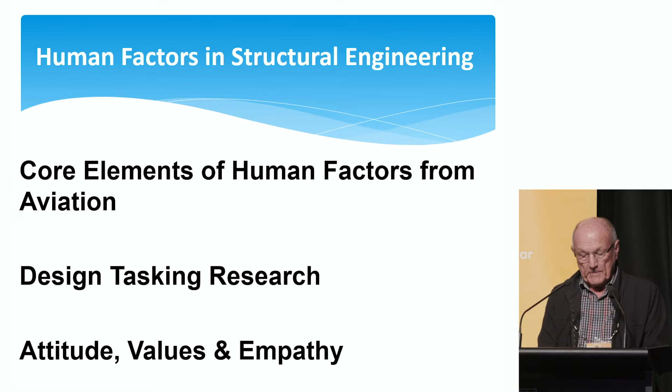So as we heard this morning, and most of us are aware of, engineering mistakes continue to be in the headlines, New Zealand, Australia, and overseas. Something's wrong. And as Paul said, when quoting Einstein, I think it was, do the same thing, you get the same answer. So I think we've got to look at doing something different. In aviation, the passenger death rate was recorded from 1920 through to 1977, showing a steady increase. And after that, it's descended with a tenfold reduction.

In 1977, two Boeing 747s collided on the ground at Tenerife Airport, killing 583 people. And Captain Downey, in his address, said that was a watershed moment for aviation, because we decided as an industry that we had to do things differently. It began as cockpit resource management, and then crew resource management, and then fully blown human factors. And that study of human factors and implementation of it has and continues to have a significant improvement in aviation safety.

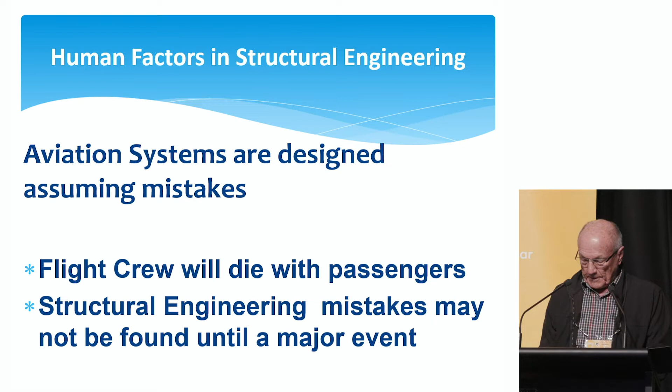Some other industries have taken on human factors, especially those in safety critical and high risk areas, including transportation, oil and gas process industries, and the nuclear industries. The medical profession in the UK recently called on aviation experts on human factors to try and improve their performance in hospitals. Now, we as structural engineers, we study materials and systems, but little, if anything, formally about the people doing the structural engineering.

Human factors, what are they? On the slide there, there's a bunch of different disciplines involved: various forms of psychology, industrial engineering, cognitive science, computer science, and medical science. So the term really refers to the range of issues that affect how people perform their tasks in work and non-work environments. It involves applying knowledge about the human body and mind to better understand capabilities and limitations. They are social and personal skills which complement our technical skills.

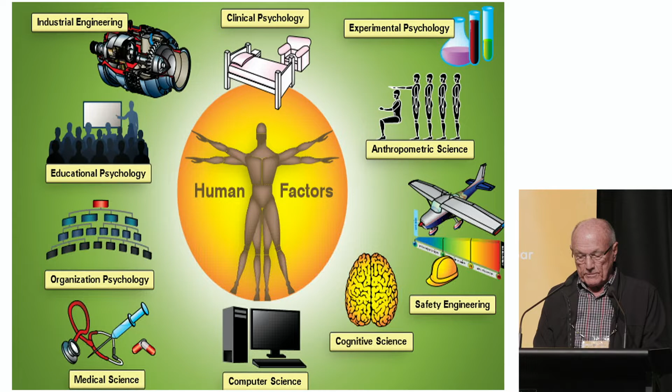Now, for today, I've taken the 9 core headings from the New Zealand Civil Aviation syllabus on human factors, and there are just very brief introductory comments under each heading.

Organisational factors. The culture of an organisation is crucial. In aviation, a just culture or no-blame reporting of incidents and mistakes is encouraged. So if the proper resources are available and to hand, there's a greater chance that the task will be completed effectively, correctly and efficiently. A happy workplace where openness, good communication and positive support exist will encourage higher productivity and lead to fewer errors and mistakes.

Stress and fatigue. Fatigue is a general term used to describe physical and or mental weariness that extends beyond normal tiredness. It often leads to mental fatigue, a decrease of attention, and of the ability to perform complex or even quite simple tasks with customary efficiency. Stress. There's a whole bunch of types of stresses, but usually they can be accumulative.

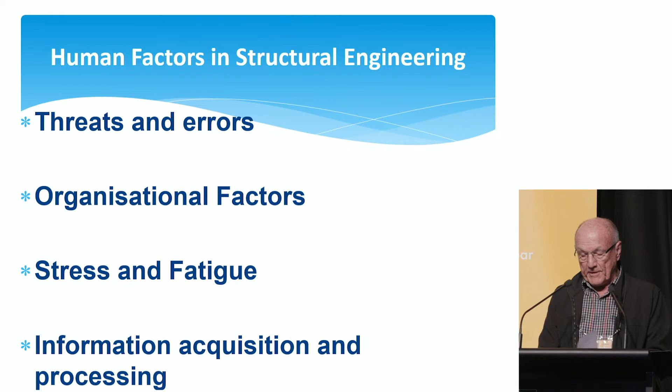Situational awareness and workload management. Situational awareness is really just knowing what's going on around us, and was traditionally applied to the flight deck and the pilot knowing what was going on around him or her, so they then could anticipate and know what they might have to do next.

Workload management's the process, obviously, of distributing work amongst employees and monitoring its use and making sure that people are not overloaded and they've got the right amount of work ahead so that they can perform their tasks efficiently. Again, important in both aviation and engineering.

Decision-making. Attention and perception shortcomings can clearly affect our decision-making. If we perceive something incorrectly, it may mean that we'll make the incorrect decision and then an inappropriate action. So we depend on our memory to make decisions. Sensory and short-term memory have limitations both in terms of capacity and duration. It's important to bear in mind that our memory is fallible, so information may not be stored or may be stored incorrectly.

Communication. Poor communication is almost always on the list in aviation accident reports. It refers to the transmitter, the receiver, as well as the method of transmission. Transmitted instructions may be unclear or inaccessible. The receiver may make assumptions about the meaning of these instructions, and the transmitter may assume that the message has been received and understood. With verbal communication, it's common that only 30% of a message is received and understood. So good communications are critical in both structural engineering and aviation, and poor communication often features in engineering disciplinary cases.

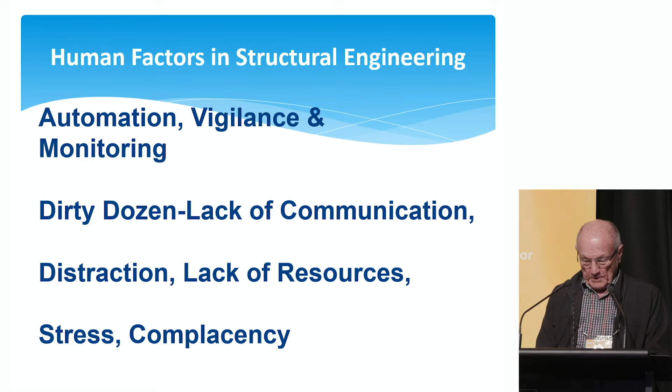The other group, a group called the Dirty Dozen, comes from aviation maintenance. Now let's go through these headings, because some of them have already been covered, like lack of communication, distraction, lack of resources, stress, complacency, lack of teamwork, lack of awareness, lack of knowledge, fatigue, lack of assertiveness and norms.

So workplace practices, in all sorts of workplaces, develop through time and depend a bit on that workplace culture. They can be good and bad, safe and unsafe. And they're often described as, well, that's the way we do things around here, and they become norms. Unfortunately, they're not always appropriate.

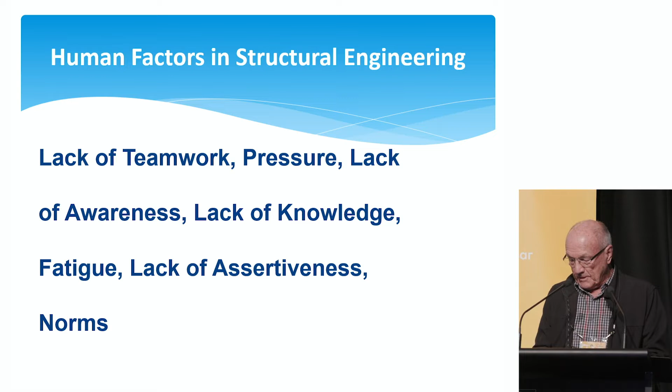So in addition to the aviation sector, I thought of a few other human factors that might affect our performance. So different personality types affect our practice. Are our outcomes different from high risk takers compared to the play it safe personalities? Is the engineer a team player or individualistic? And what's the role of ambition, hubris and arrogance, together with the more unsavoury aspects such as greed and avarice?

Now, I didn't really know what hubris meant until I listened to the Lessons Learned session by Bryan Leyland, where he attributed hubris as playing an important part in the failures of the Ruahihi and Wheao hydro schemes. And if you haven't seen that, it's a very good webinar, and it's available on the Engineering New Zealand site.

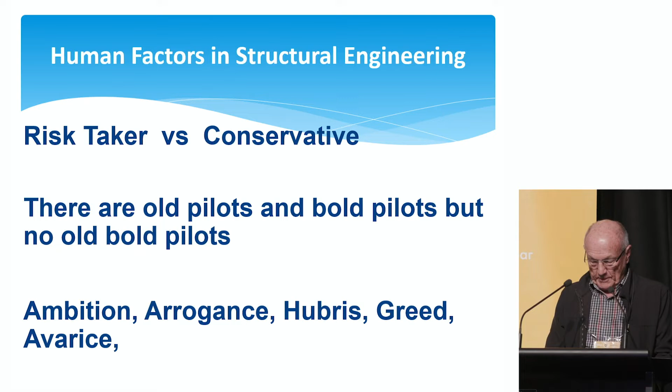Our work environment can affect our performance. If we work in isolation, only considering one's own responsibility can lead to tunnel vision, a partial view, a lack of awareness of the effect of our actions and how they affect others. So it's important to ask others to check our work when we're gaining experience.

Reason's Swiss cheese model has already been referred to today. Again, for those that are not familiar with it, imagine a series of slices with a bunch of holes in them. Some of those slices may be active, some may be latent causes, and when the holes line up, then we get an accident, mistake, or a failure.

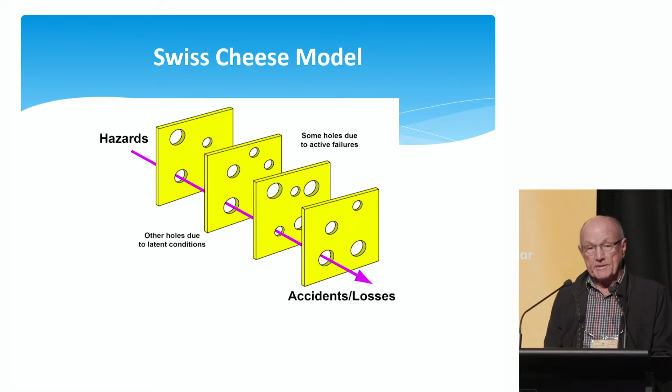There have been a number of surveys on structural errors, and these indicate that 43% of the failures are related to design, 35% to construction, 15% to maintenance, and 7% to other causes. And of those for design, other research indicates that lack of knowledge accounts for 44%, motivation 35%, information 18%.

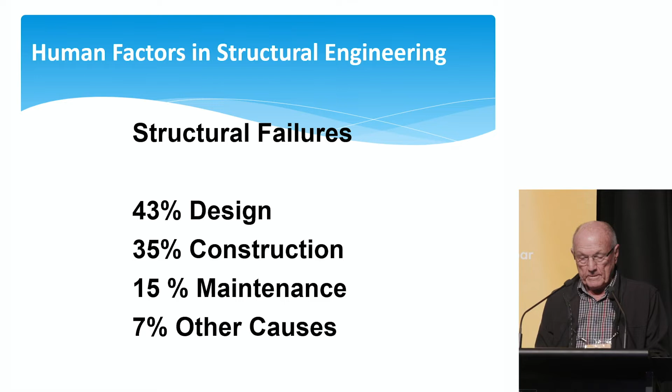So what about the costs of design errors? The Australians carried out a survey on 139 construction projects, and there the design error costs were estimated to be 7% of the contract value, regardless of the contract type or procurement.

So I've tried to have a look at what the GDP might be for the construction sector in New Zealand, and had a look at some of their data, plus the data from the PricewaterhouseCoopers study for Engineering New Zealand. So maybe of the order of about 20 billion a year. So if we convert that, errors and mistakes in design could be costing $1.4 billion a year, which is quite a tidy number.

So structural engineering, uncertainties abound. Our task is to synthesise a solution which meets the client's requirements. Not only must it be designed to be safe, it must meet functional, performance and environmental requirements and be delivered at an acceptable cost. So uncertainties are a perpetual companion for us.

Through design, we construct imaginary buildings with uncertain geometry, with materials of uncertain strength and quality, to withstand loads and environmental conditions of uncertain magnitude and kind. To that we must add the human factor, which means that there's an uncertain amount of errors and deviation from what was intended that will be incorporated in the final structure. Sometimes these are obscured to the practicing engineer by the development of design codes to manage some of the more important ones, for example, loads and materials properties.

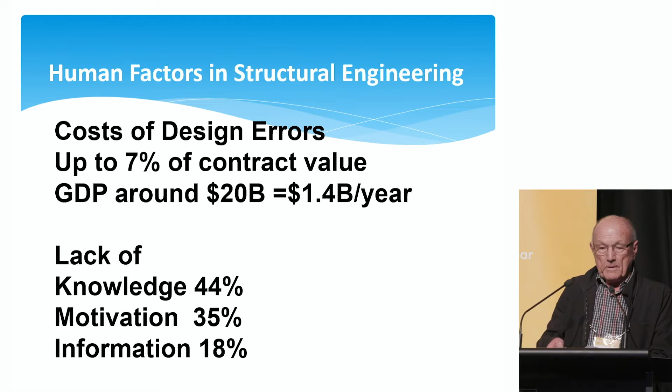Engineering Modelling Uncertainties, EMU, was developed by Swedish researcher Fröderberg, who showed that well-defined engineering tasks generate a large variation when solved by different engineers. EMU has a large impact on structural safety. It is usually time-dependent and diminishes throughout the design process.

So normally it's not possible to obtain a correct solution. Usually a range of acceptable solutions is more appropriate. Other studies, Dehan and others, show that self-checking of designs, even just simple tasks such as looking up tables, shows an error rate of 2.4 to 3 times the chance of errors compared to those with independent checking. So again, that reinforces the need and the critical role of effective quality assurance and independent checking.

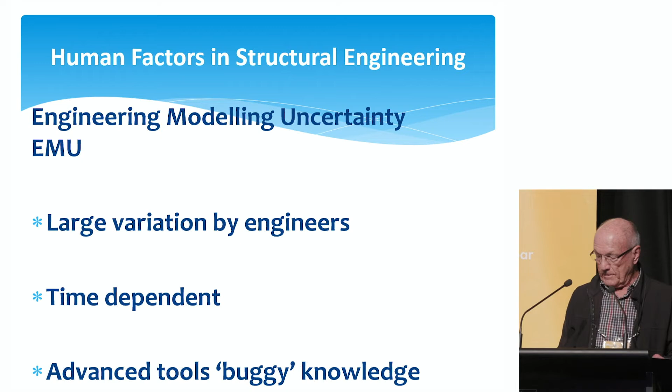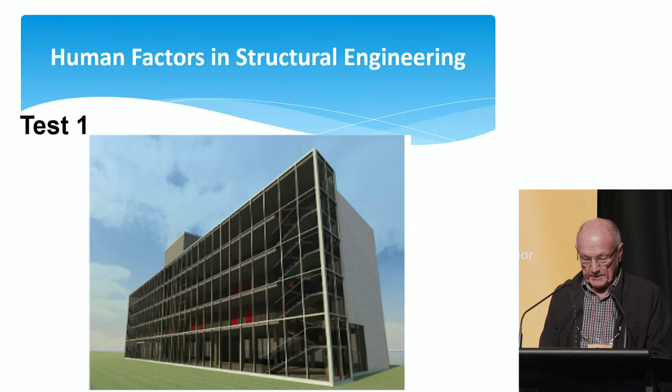So in Sweden, 17 engineers of varying experience were given design tasks and limited time to carry them out. First was this 5-storey concrete building. Second was to design a truss over a stadium, a 68-metre span truss. Afterwards, they had a qualitative review. The results indicated a 300% range in the loads of the ground floor column of the 5-storey building, and the steel on the trusses varied between 20 and 50 tonnes.

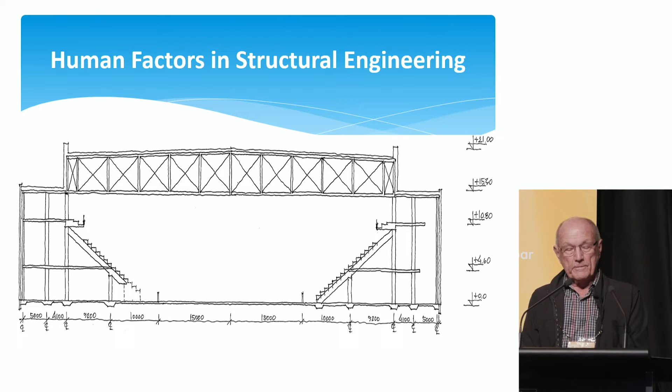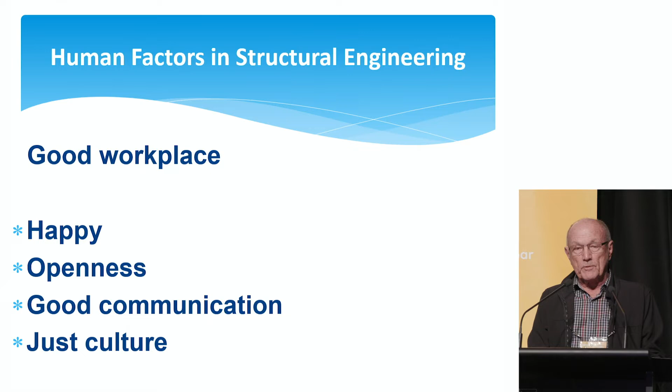Also, an important finding of the review was that the majority of those 17 engineers had had little review of their calculations, their work and their practice up till that time. So what then makes a good workplace and a good engineer? I'd suggest it's a happy workplace where there's openness, good communications, a just culture that will provide satisfaction for all workers, enable them to reach their potential, improve productivity and reduce mistakes.

Now, coming back to aviation, there's a YouTube video, Defence of Flying, which has some good points on human factors that are also relevant to us. These include the difference between attitude and values. Attitude can be short-term behaviour and easily manipulated, whereas values are long-term, developed over time, and include what means most as a backstop to decision-making and making the right choice. Empathy can be our greatest advantage in understanding others, but also our greatest weakness, especially if you do not want to disappoint. So understanding human nature, good self-reflection, a strong code of ethics and values help to make the right choices and become a good engineer.

So I believe that better understanding of human factors, as in aviation, will lead to improved outputs. And if we can emulate the success the aviation industry has had by adopting human factors, maybe we can get the tenfold reduction in errors and accidents that we need. I believe that positive aspects will flourish and that our profession will be better off.

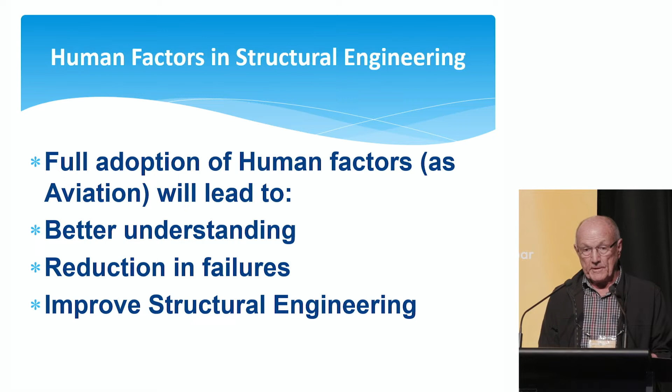At the same time, we're still seeing some examples of poor engineering, a confrontational nature, and that can be seen as bullying, which are the behaviours that we're trying to mitigate in our careers. So are we getting better now? That's probably one of the questions that we'll cover.

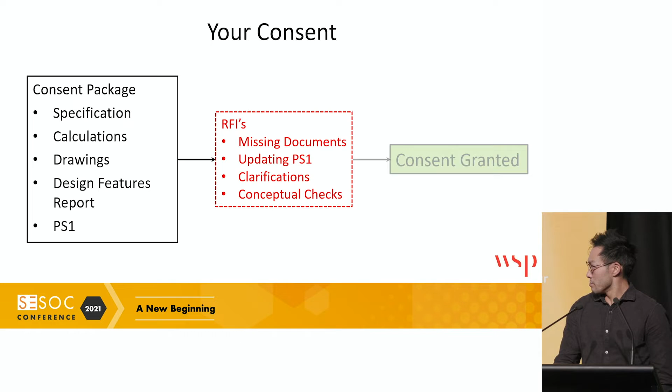And once all those are cleared off, consent is granted. So the councils look to classify buildings in three categories depending on the complexity. Your category ones are your single-storey houses. These are normally screened out, so I guess the engineering side doesn't get looked into.

In terms of category 3 buildings, there's some that we don't necessarily look at, and those are your high-rise buildings, and they normally have a PS2 and that high rigor that is beyond what we do as a regulatory review. In doing peer reviews, something to be mindful of is that the person undertaking the peer review does have the right experience, and you are doing those communication logs to see that the right questions are being asked.

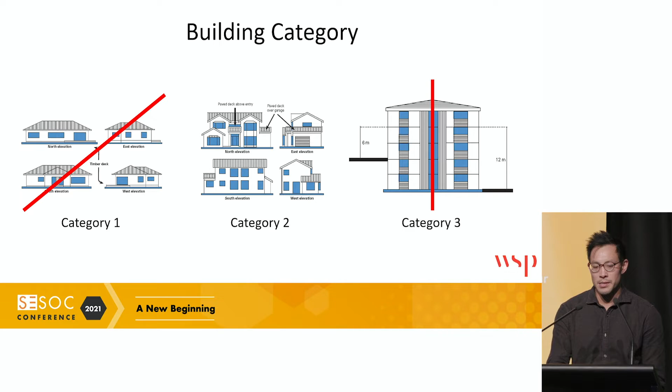So in terms of the review time we get, you can see, for Category 1 buildings, looking at 60 minutes, and then for Category 3, we're looking at 3 hours. So the role of the regulatory review is just a screening tool. We're not looking through all your information. If you think about the work you submit, your 100 drawings, your 200-page spec, and your 600-page calculations, we're not actually going to look at everything. It's more of a screening tool to make sure everything ticks the boxes.

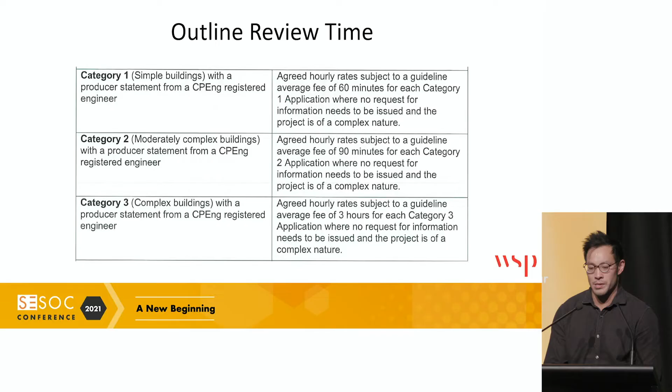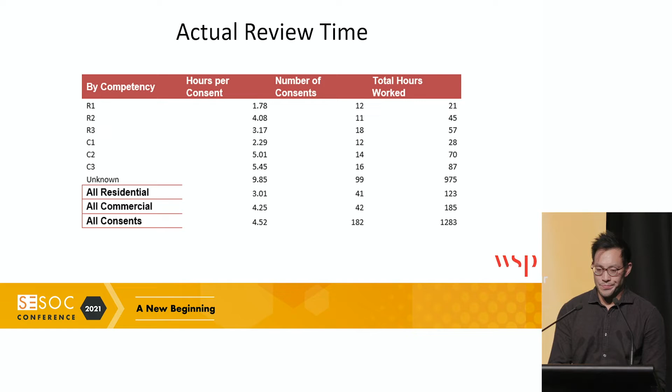And this is the actual times that we're looking at. So when you think about it, it is in line with what is being expected. So this is a slide that I put up in 2019. I still find it a bit hard to put up, just because some of the comments that do get made to reviewers can be quite confronting.

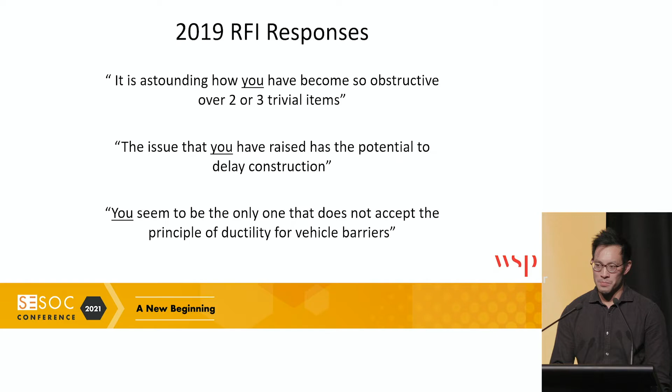And I guess the thing is, it is your responsibility as designers to respond to RFIs in a respectful manner. It's not even a professional thing, it's probably more of a human thing. So let's all be nice to each other.

What we're seeing in 2021, probably much the same. There's still a lot of trying to elaborate on things which are unnecessary. And when we even look at the question, do we actually need a response like that? Why would you waste your time writing that out when all you needed is a simple answer?

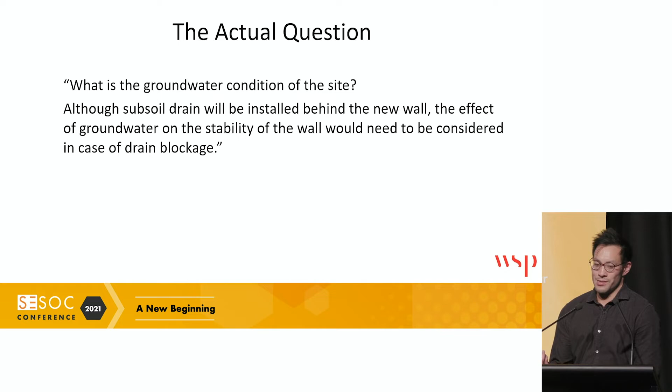So how should you respond to RFIs? I think just be professional, read and understand the question. Put yourself in the reviewer's shoes, and don't just go blaring out thinking you're right all the time. If it's an easy answer, then respond with enough information. If you think the answer is already in the documents, then just provide the right references to that.

And if the RFI is valid and you change something, this is a good outcome. The system has worked, so change it and respond appropriately. Don't bluff your way through the answer. Time and time again, we've seen that engineers will use their calculations and submit pieces of paper which don't have the information that you need.

And when this happens, you go through multiple instances of RFIs, and then it's finally changed. And when people actually realise it's changing from, say, an M12 bolt to an M16 bolt, it's kind of a bit of nonsense. It should just be done, to be honest.

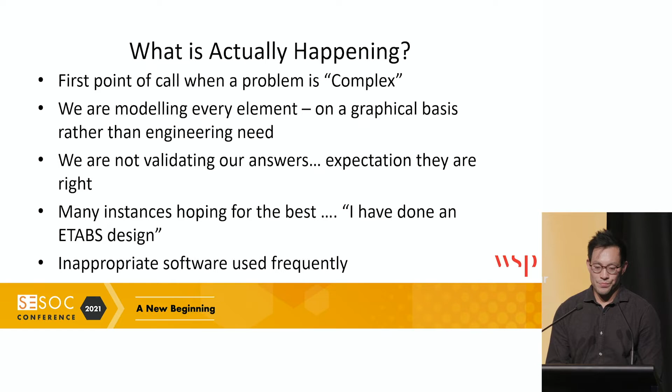Half time, you get me now to take over from Stan. Thanks, Stan. That's excellent. So in this talk last time, Stan gave some specific examples and put up some anonymised real examples. We're not going to do that this time. You're just going to have to take our word for that, and there are plenty there. We were fighting over it for about 6 months, who had the best examples, Stan and I. So I don't think there's any real benefit in that.

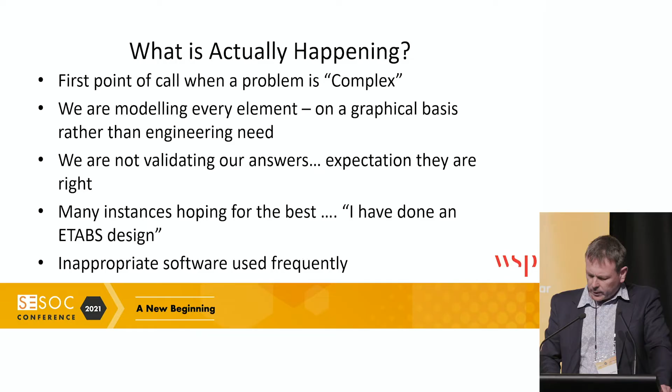So what I wanted to do is talk about some of the results of what we're seeing through our behaviours in submitting for consents, and also behaviours within the industry, and where some of the councils are going with this. Here's a draft proposal that Wellington City Council is looking at around incidences of bad behaviour from engineers and what they have to do to manage that. They are putting a register down to see how they can manage and deal with this. Why do our consenting authorities, why do our clients have to do this? Aren't we professionals?

Just a wee note, these are being shared around between councils, and councils are coming up with these processes. If you look at Auckland, they've got a different process where they pretty much make you do a PS2 for everything, and the industry looks after it. But a lot of the regional councils, this is what we're getting. So let's just move on from that.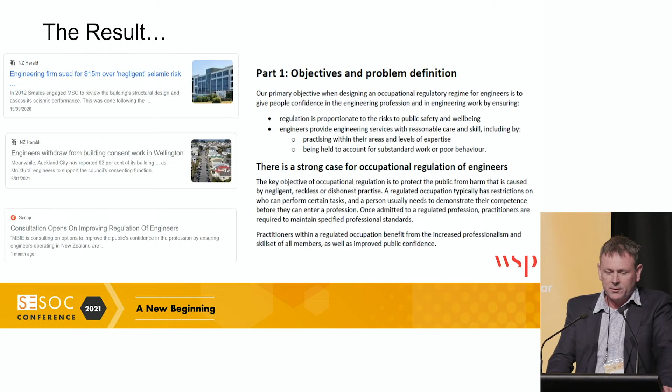And lastly, the regulator. Consultation has opened up on improving regulation of engineers. They've had to take notice and they've had to take action. We currently have consultation on improving the regulation out now, and I read part one, and I get down to the first paragraph after the bullet points, and this is pretty strong stuff. The public need to be protected from us through occupational regulation because we're negligent, reckless, or dishonest. As an engineer loving the profession and putting a lot into it over the last nearly 30 years, I'm really disappointed to see that we've gone from one of the most trusted professions to one that has to be strongly regulated.

And anyway, to summarise, we are still seeing a few poor behaviours in submission. Similar to what we talked about in 2019, councils are now being more active in monitoring. There's less tolerance by the public for poor engineering outcomes. We are seeing a more active litigation front, and the outcomes affecting reputation and trust, and the media coverage. It's so easy to put media coverage out there now. You don't have to fight for space on broadsheet media. It can just get out there. And Phil Pennington from Radio New Zealand loves to find engineering stories. And our regulator has been forced to act as a part of this pressure. So now is the time to look at where we've got to and move forward and show that we're a great profession.

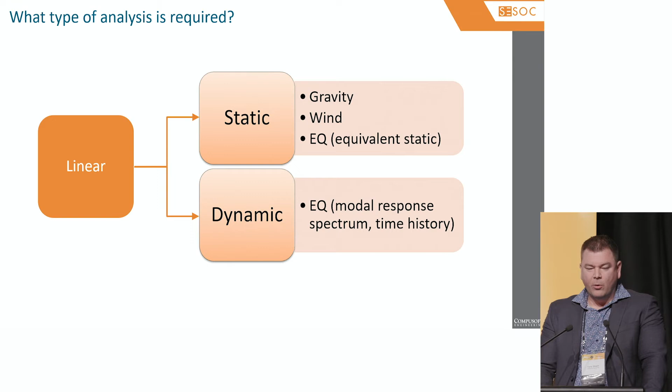So we've introduced the idea, and it's come up already, that you've got linear and non-linear analyses. Linear analyses are obviously the ones we do mostly, so I think it's important for us to define what the different analysis types are and when they would be mostly used. So for linear analyses, we split between static and dynamic type analyses, the routine ones being in this block. The key one there being earthquake actions are considered in each box we'll talk about today, but in varying degrees of complexity.

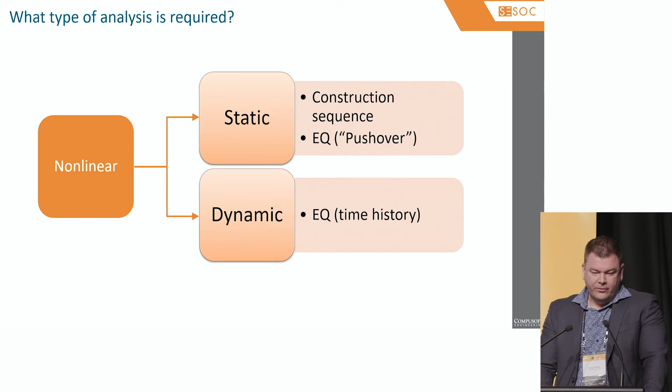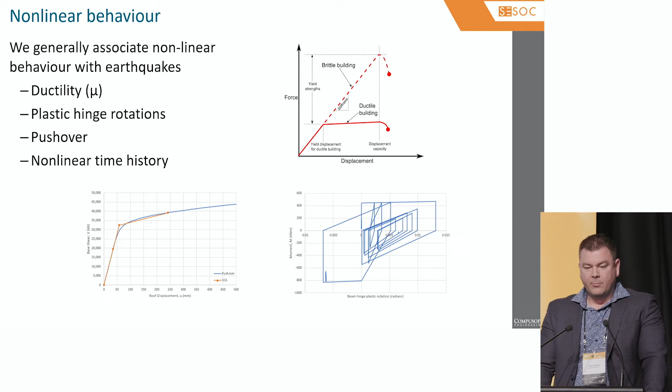Again, for non-linear, we've got similar processes, where we're looking at different effects such as construction sequencing or nonlinear behaviour during earthquakes. Importantly, you'll note that there is no such thing as a nonlinear response spectrum. More importantly, we generally associate nonlinear behaviour with earthquakes. We all understand the concepts of ductility, plastic hinge rotations, pushover type analyses, and nonlinear time histories becoming more commonplace via the assessment guidelines. But it's also important to note that nonlinear behaviour exists in many other facets.

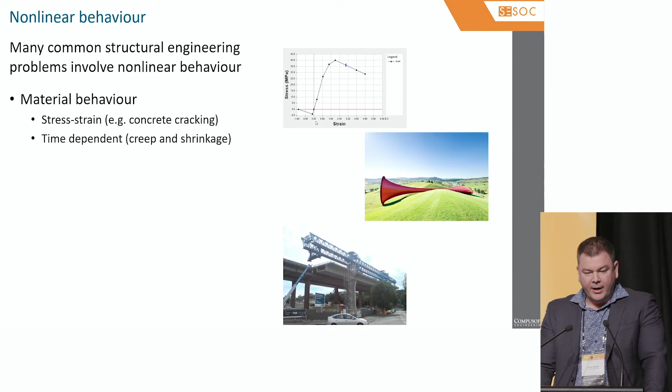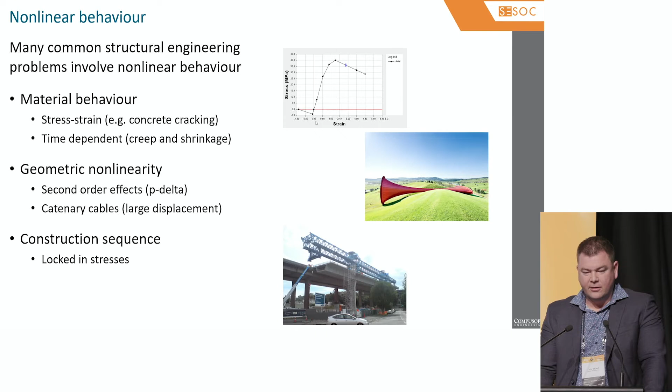We talk about things like material behaviour, stress strain level, or time dependence. Geometric nonlinearity in terms of second order effects, be they seismic related or at wind or gravity demands. We also talk about catenary cables, which have large displacement problems and are therefore nonlinear, and construction sequencing, which locks in stresses that aren't necessarily apparent.

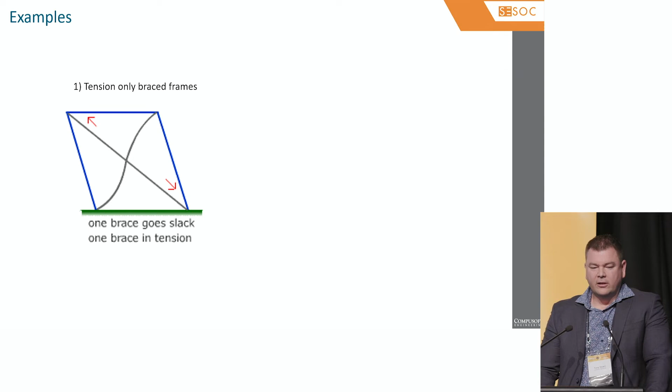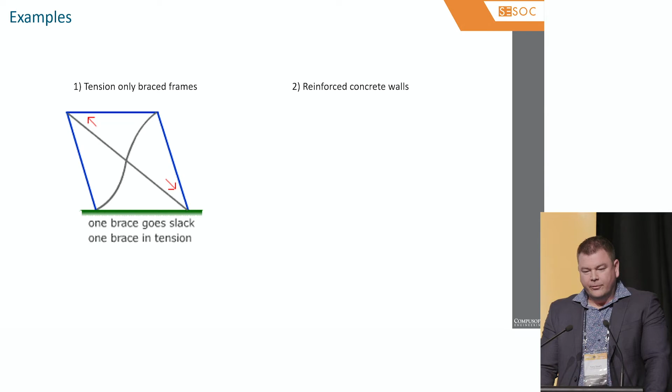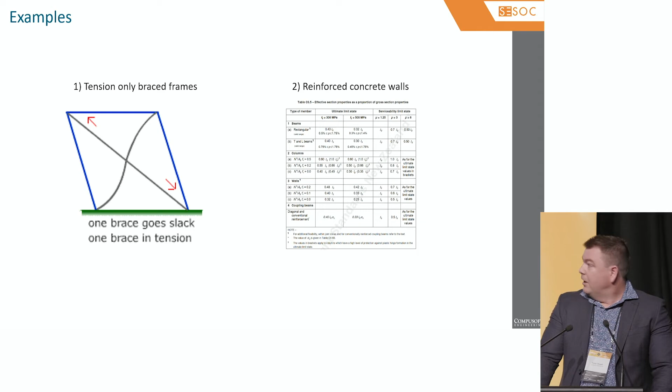So then similarly, but slightly more abstract, is reinforced concrete walls. Reinforced concrete walls are inherently nonlinear even without ductility, just purely because of the material behaviour of the concrete. Obviously, we accept this inherently. We routinely apply these stiffness reduction factors out of 3101, blindly, mostly. So on some level, we understand that the model cannot represent the underlying behaviour of the material.

So let's look at our first example. Pretty boring stuff really, but it serves the purpose. So we've got a 10-storey brace frame with tension-only bracing. Now tension-only bracing obviously occurs for these slender elements because they buckle, which is geometric nonlinearity.

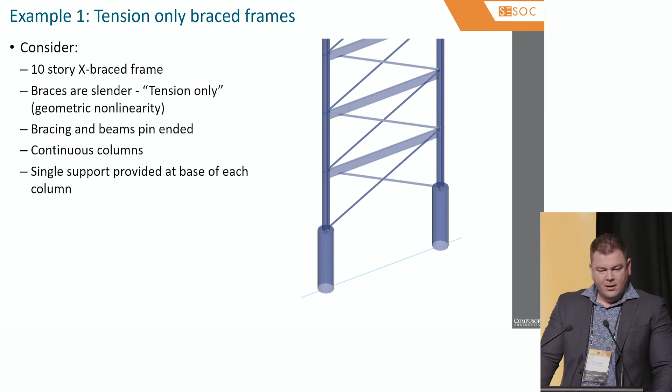Okay, so this should be pretty obvious, I think. Everyone would accept this already. That if we apply a set of consistent forces to both frames, where we're modelling one as linear and one as nonlinear, the nonlinear analysis deforms more than the linear process, which I think we all understand and accept, because obviously the linear one will have compression and tension acting at the same time. Obviously the difference in the behaviour is indicative of the linear process being inadequate to describe the problem at a stiffness level.

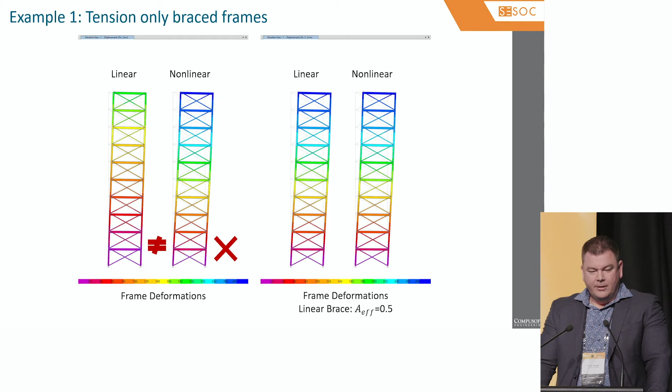So what's often done is to modify the area of the cross braces with a factor of a half. So the intent here is that the stiffness of each bay is correct, but internally obviously we've applied a bit of a fudge to it. By doing so, we end up with consistent deformations for the same load set. So on the one hand, we'd be happy, and we may even say, well, we could do a response spectrum with that even. So all good.

What happens though, is at a global level, we're happy with the results. We know that the total shear through the frame's correct. We know that the deformations are appropriate. But what we don't know, or what we may also know, is that the internal actions within the frame are now distorted.

For the linear process, we end up with still compression and tension; that behaviour hasn't altered as a result of the stiffness change we've made in a force-based process, whereas the nonlinear one correctly shows our tension elements in effect, and the one undergoing compression strain being inactive. So we know that this shows us the internal actions within the frame are poorly represented by this process.

When we look at the ratio between the two, we can see that the ratio of the linear to non-linear brace forces is of course a factor of 0.5, which I think we understand and already know. What's not immediately apparent though is that the column forces are also skewed in a similar way, but asymptotic to 1 at the bottom for a tall frame.

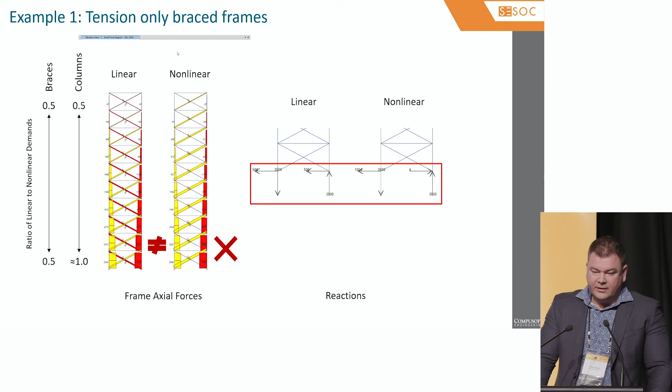Worse is the reaction forces we get at the bottom of the frame. Obviously, the linear one presumes that we can still get half the reaction to each pile, whereas in fact the only pile with a reaction on it should be the one with the tension brace active. So again, the ratios of the forces between the two processes are quite marked.

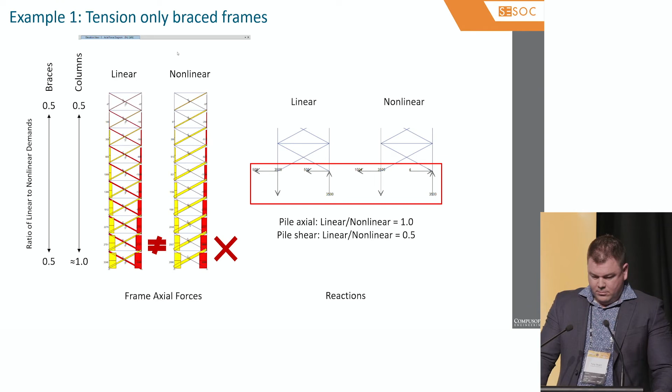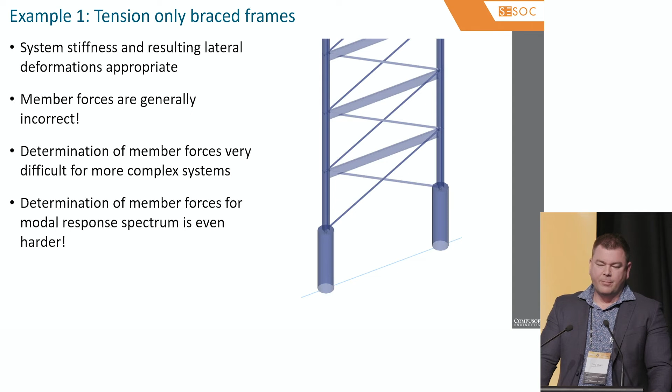So the key thing here is that modifying the stiffness, which is a generally undertaken process, can have its benefits, but extreme care needs to be taken when interpreting the internal forces. The member forces are always going to be incorrect, and some level of judgment / post-processing, if possible, will be required. It's a very difficult task, especially when you've got response spectrum, it can be near impossible, or if you've got brace bays of different widths and heights adjacent to each other.

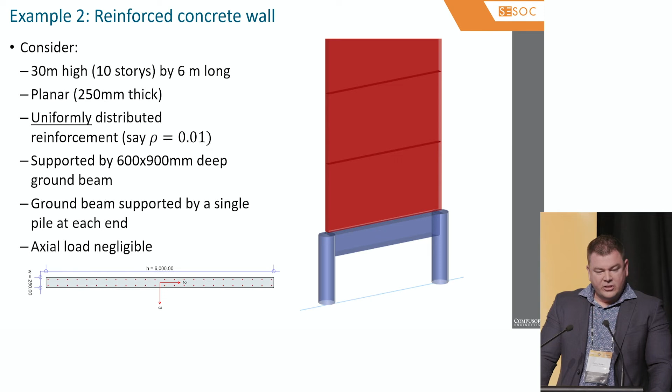So what about the concrete wall? To many, the concrete wall doesn't appear to have the same shortcomings. In this concrete wall that I've made up, the key things are that we've got a uniformly distributed reinforcing spanning within the wall. We've got a large ground beam and a pile each end, and because it makes it easier, no axial load.

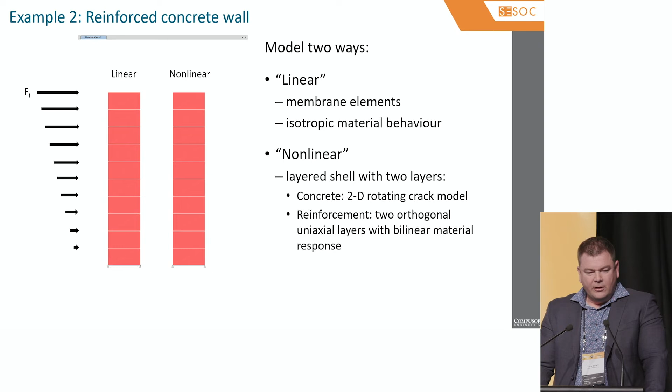Again, we want to model the two walls in two ways. One with linear membrane elements, which inherently have isotropic material behaviour, and then again with a sophisticated nonlinear layered shell to go to the other extreme. We're going to apply the same forces again. We're looking at the force domain here, to see what happens.

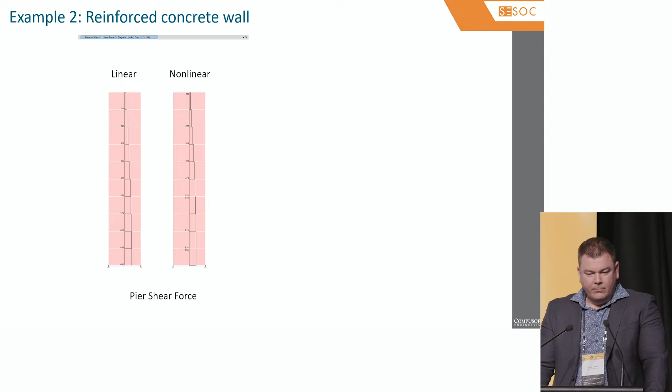So the pier shear forces between the two models, there's a good check. We know that they should be the same, and they are. You might not be able to see the values, but they are. And similarly for the pier bending moments. So this shows that the way you model it doesn't matter at a force level anyway. Obviously, you can still design these walls using the linear process. But what we're trying to show here is what the underlying behaviour and the non-linearity that's present is actually manifesting as.

So let's look at the stresses. These are the vertical bending stresses in the wall. Again, this shouldn't be a surprise. We already know that we would generally use these values for design and use appropriate PM interaction curves and standard shear design formulas. We wouldn't be using stress fields for the design of a reinforced concrete wall, and for good reason.

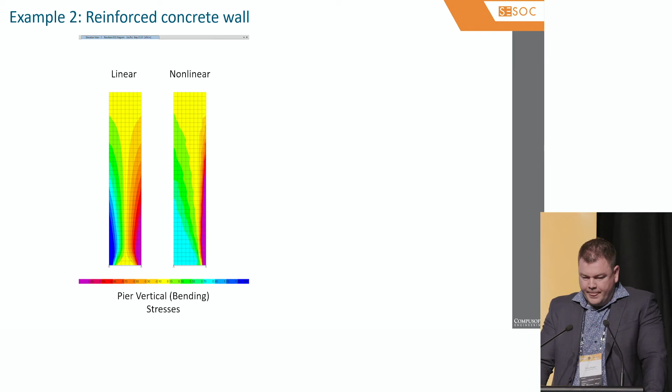The linear model on the left shows that the wall thinks there is a neutral axis at the midpoint of the wall, which is the yellow band. The one on the right shows correctly that the neutral axis migrates when bending as cracks form at the bottom of the wall and the reinforcement is mobilised. Again, this is not news, I would think, because we usually wouldn't be looking at this. So I think we all know it's there, and we wouldn't do that.

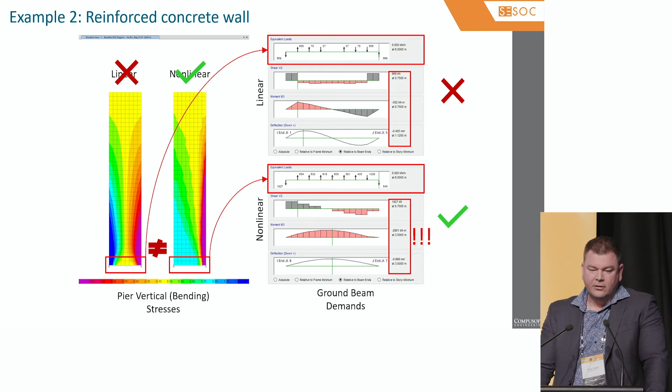So clearly the linear one is valid with the right assumptions and procedures in place, because we'd said that because the bending moments were all good, we could have designed it. But what we need to be careful of is that the ground beam that's in the model, we need to consider that in a similar vein to how we would consider the internal stresses that are present in the wall itself.

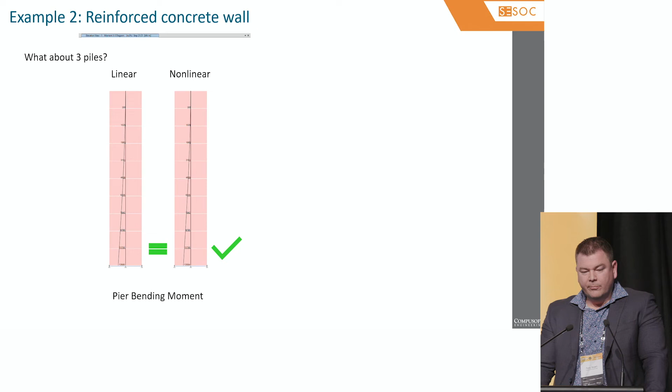So what if we extend that to 3 piles? Again, nothing's changed upstairs, the bending moments etc. are the same. But the pile forces are quite different. The linear one with the neutral axis at the midpoint of the wall thinks the middle pile has no demand, whereas the nonlinear one correctly allocates the tension to the middle pile as well as the outside pile. And importantly, it also shows that the demand on the compression pile is increased due to the reduced lever arms.

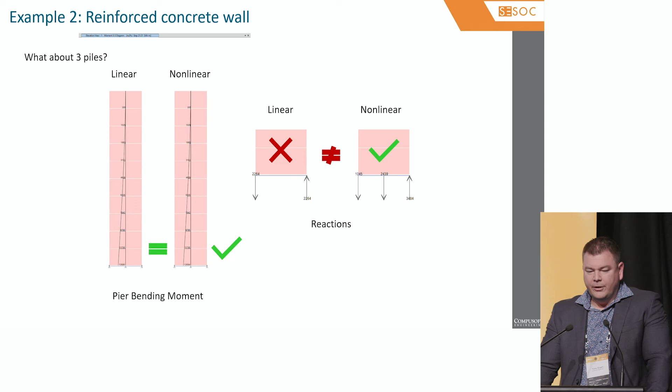Now, this is all very interesting and good fun, of course, but it's not real. I'm certainly not advocating that this process would be something you do on a daily basis to determine the ground beam force. So it goes back to earlier comments that we've got to pick the right tool for the job and do the level of work that's warranted for the task at hand and use other methods. So in this instance, all we'd need to do is apply the stress that's at the bottom of the wall onto the beam. That would then give us the correct bending moment and pile force by hand.

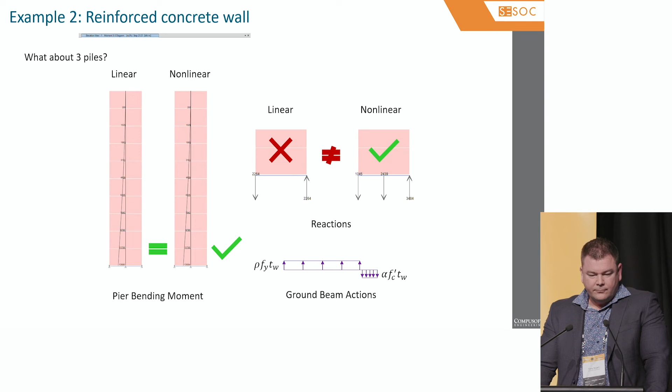So what we have learned here is that for an inherently nonlinear system such as a wall, we can describe the global behaviour of it, be it at a stiffness level for stiffness reduction factors, or at a force level by integrating the stresses to form global bending moments and shear forces. Local stresses, again, are not suitable for use in any process, unless it's of course a steel wall, but that's unlikely.

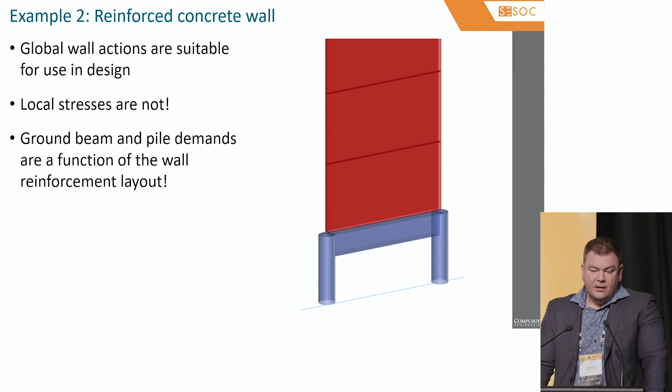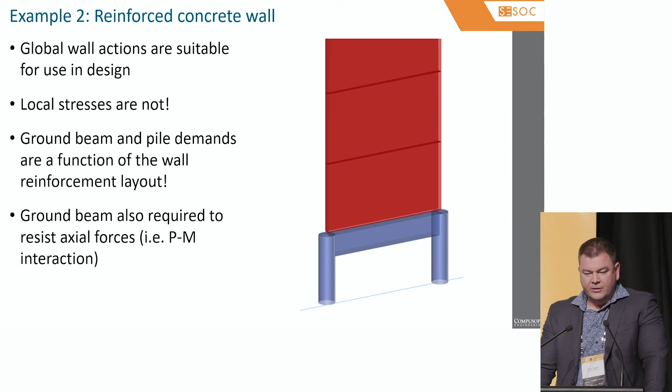And we need to treat the ground beam and piles as a sub-assembly of the wall itself, where the demands are derived external to the process, considering the reinforcing layout rather than the bending moments coming out of our software. The other thing to be mindful of is that the ground beam is also required to carry axial forces in a similar way as we saw for the cross-brace frame. In the cross-brace frame, if we want to mobilise the second pile, we have to drag that force back to the other pile. A similar problem exists here, but would not manifest itself in the output from the model.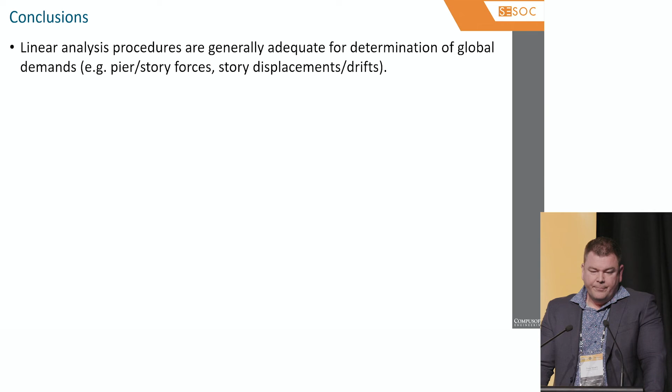So, what conclusions have we got? The key thing here is that linear analysis procedures are generally adequate, they have been around for some time, and that's why we do them. They've been well verified and, especially when used in conjunction with design procedures and codes, they are adequate for the purpose. We need to be very careful when determining local actions when the underlying behaviour of the system is non-linear.

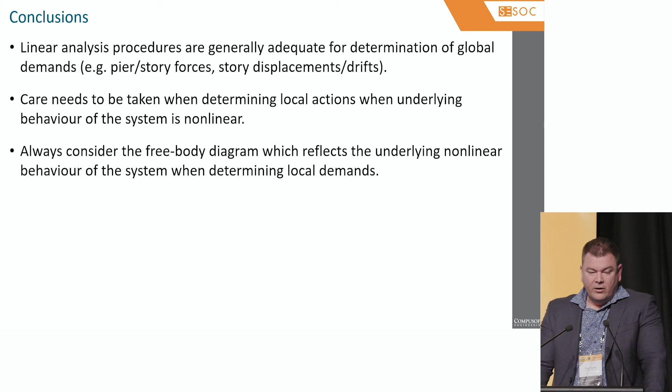The forces applied to the ground beam are a good example of why we always need to reconsider the effective free body diagram that reflects the underlying non-linear behaviour of the system, as though that's the real force that we need to design for.

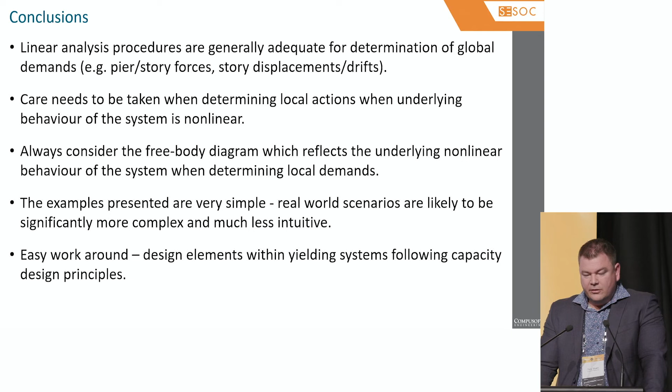And of course, these examples are quite trivial in their complexity. Real-world scenarios, as I said, with multiple bay widths, heights, and analysis procedures make things a lot more difficult to determine what's going on, and certainly less intuitive. I guess I can't just give you all problems, but the key thing here is that the easy workaround is to design with capacity design to keep these things at bay.

Okay. I'd like to have a rant, so my 2 cents. Obviously, I'd like you to buy more black boxes, please, but it's helpful for me if you understand a few things as well.

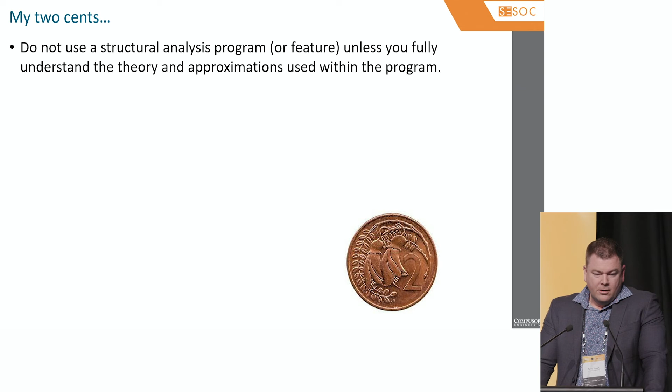So the key thing is don't use the structural analysis program or a feature within it unless you fully understand the theory and approximations that are used. The most important thing in my mind is to understand and define the loading, material properties and load paths, etc., before we begin a computer model. To me, the conditioning of the problem is the most important part. The computer modelling is a subset of the overall task we're all tasked with doing.

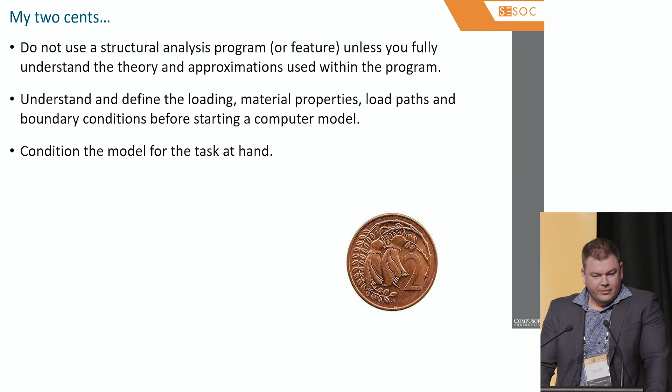Conditions, yep. So to me, the computer modelling is the easy part. The hard part in engineering, in my belief, is defining the inputs and interpreting the outputs. I'd say you could get almost anyone to build an ETABS model these days and get it to be sensible, if the inputs are conditioned properly and understood. If we've only got limited time, focusing on the inputs is more important than the model itself. And read the manual.

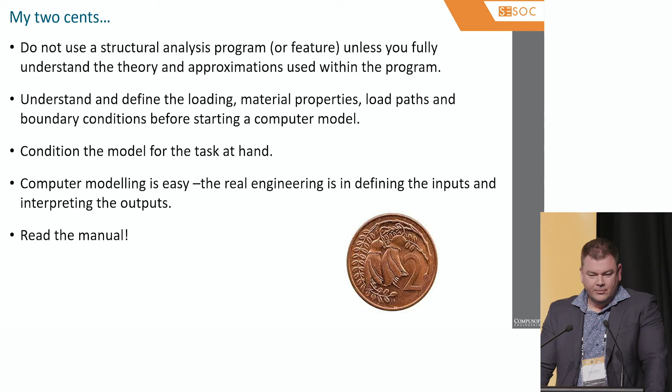Yes, that goes back to, I think, a similar thing that John was saying before, that a good mantra to live by is to do things as simple as possible, but no simpler than is necessary. We've obviously got a task at hand to do, and different levels of work, be it design, assessment or forensics, etc., will warrant more complexity in certain models, but there's no point in chucking everything at it. We want to do the bare minimum to get the answer that's warranted.

Thank you. Thank you, Tony, and it was nice to finish with some real worked examples of some of the themes from the earlier conversation from John. Look, we've got a few minutes. If anyone's got any questions they want to ask one of our panellists, we covered quite a bit of territory there. So if there are a couple of questions, Peter.

Hello. I was just wondering, Stanley and Carl, just a question about building consents, etc., because I understood that about a year ago, Engineering New Zealand was looking at having a think tank on the peer review process, and I've heard no more. Did that ever happen? Because it was getting pretty ropey at the time, and all this infighting was going on, so I would like to see some more of that happen at a high level, so we start to talk to each other, a bit like marriage guidance. I'm quite good at that.